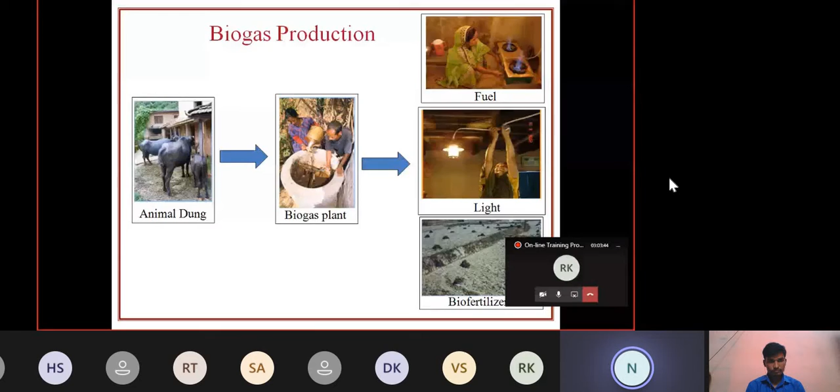Similarly, biofertilizer - when you have biogas or agro waste, you can make biofertilizer from that, because the slurry and other things and the compost can be used to make biofertilizer. These are the ways to make waste to wealth, they say, right? So these are the ways to do that.

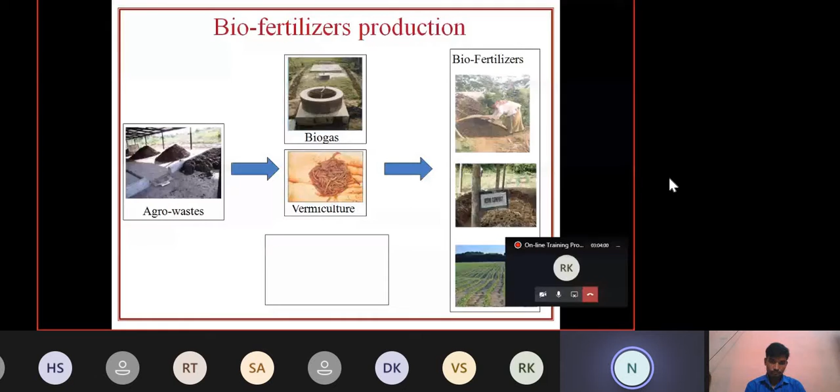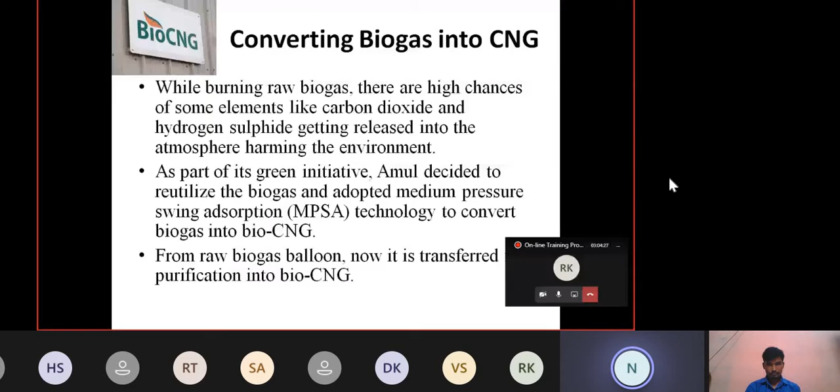Now, I said biogas is only 65% efficient. Is there a way to convert biogas into CNG that is almost equal to LPG, liquefied petroleum gas, that we are using? So it is possible. Biogas can be converted into bio-CNG also, and for that there are technologies available, like MPSA, and there are technology providers who can give about 93-95% efficiency, like LPG. And the same can be used as a fuel for cars also.

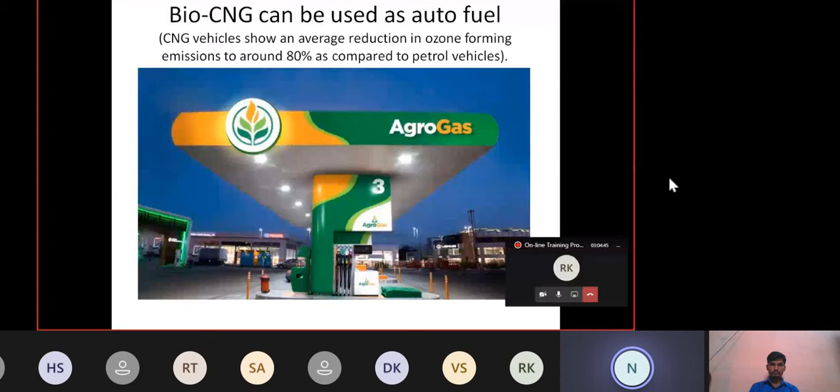It's possible, and it is called agro gas. Commonly it is called agro gas and bio-CNG, and it is about 93% efficient compared to LPG. So this is possible. Why I say this is, when you talk in terms of a cluster or a block, you can think in those lines.

Otherwise, for a panchayat, vermicompost is enough, windrow compost is enough. But when you think at large scale, it is possible - you can think in terms of how to convert waste into energy. These are ways to convert waste into energy, right?

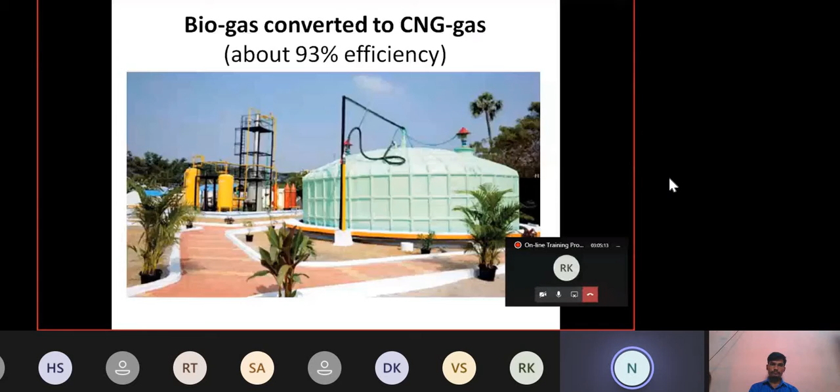So this is the biogas purification and bottling plant. Biogas is purified as CNG, bio-CNG, and then bottled, which becomes about 93 to 95% efficient, and it can be bottled and sold also.

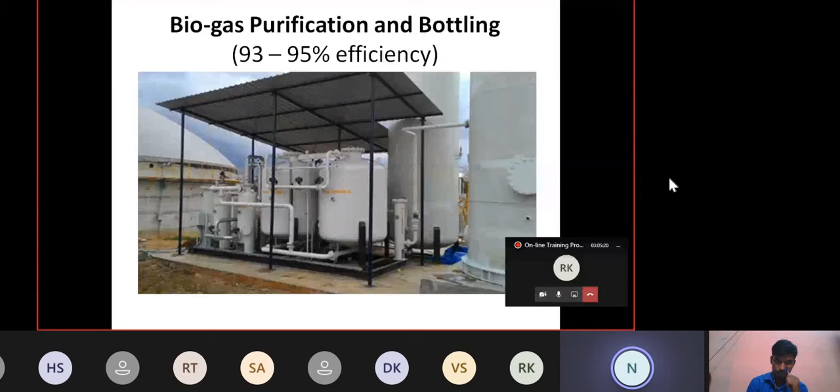That is one option. The sixth and seventh option you have is gasification of biomass for rural electrification. It is possible. Biomass - we have seen in areas like Haryana, Punjab, farmers burning agricultural waste, agricultural residues. Such agricultural waste, if in large quantity, can be collected and converted into electricity. All these together are called biomass, and that biomass can be used in a power plant, fed into a biomass gasifier, and converted to power.

Which can help some non-grid villages - if there are non-grid villages, that can help light some households there, depending on the amount of waste. But I told you already that I won't go into the details. And if you think in terms of electricity generation using biomass or waste like this, you need at least 300 tons per day. You must imagine 300 tons of waste - will I get that much?

In my villages, maybe all the villages put together, I may get about 5 to 6 tons maximum. So when you think about electricity generation this way, you need a minimum of 300 tons of waste. Why I tell you this is, if somebody is proposing electrification using biomass, you need to know that option is there, but do you have enough waste biomass to use it to full capacity? You must think in those lines. So when you think of this option, biogas is no problem, even at individual level it is okay.

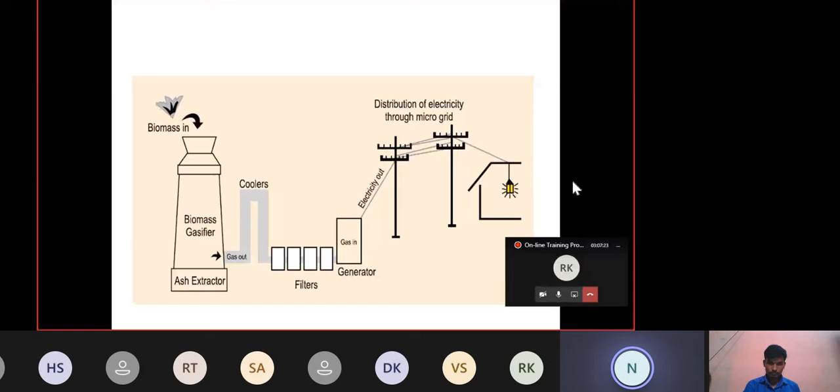This option like electrification, you can think of only if you get enough waste, and the minimum recommended is 300 tons per day. But if you can generate electricity, yes, there is a government program, and 100% power purchase is possible. Government can purchase 100% power at their tariff, and it can be sold. You don't have to think where to connect this power or how to do that. 100% you can connect it to one of the nearest grids, and you can get the money. However much electricity you are generating, that money can come to the cluster.

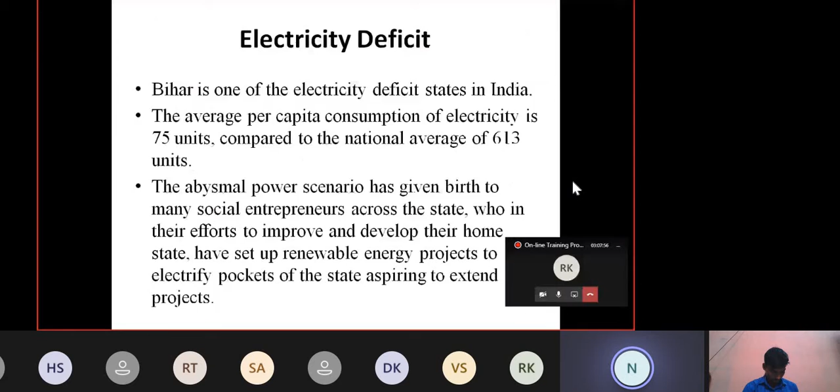There is SRE, Saran Renewable Energy, in Saran district of Bihar. They are trying to connect about 100 off-grid villages through biomass, by making electricity through biomass. As of now, there are about three biomass gasification units there, and the government is promoting that to become a 100 off-grid village electrification plant.

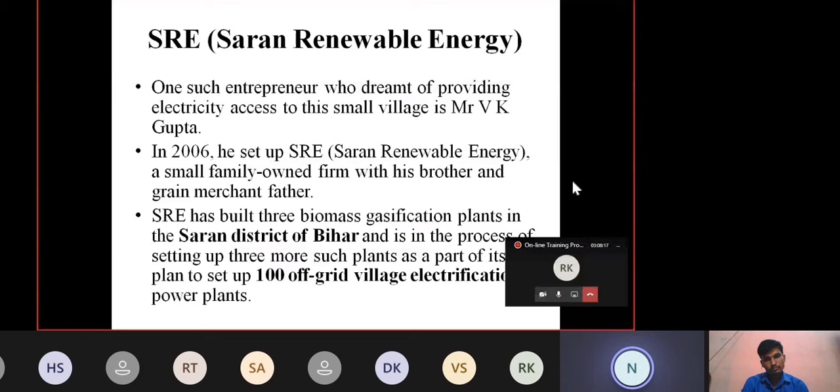Vegetable market waste, yes, it is there. We can use it for biogas, as I told you. Somebody was suggesting yesterday, why not feed it to the animals? Yes, we can feed it to the animals also if we have it. And slaughterhouse waste, fish market waste, all this, we know it can be used, like chicken poop can be used as fish feed. All these can also be used for biogas production.

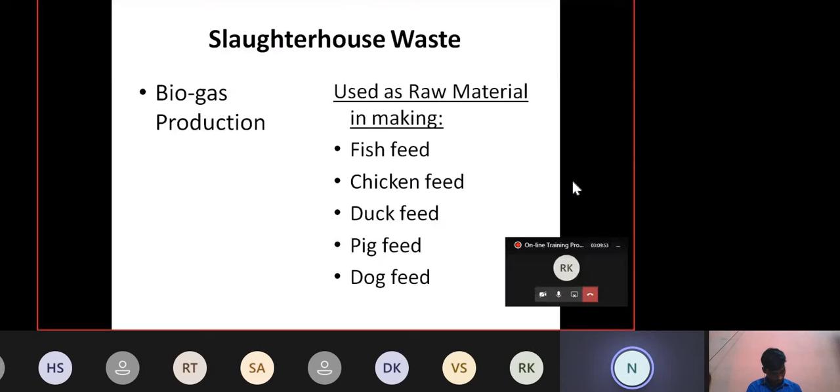Whatever slaughterhouse waste you are getting—and by slaughterhouse I don't mean only goat and sheep being cut—any slaughterhouse waste can go into biogas. Also, from the pieces you get there, the solid part can be used as raw material for making fish feed, chicken feed, duck feed, pig feed, dog feed. In these companies, wherever they are making these products, this is used as raw material. We just need to connect where they make it and supply to them. Otherwise, we can think in terms of biogas production. Wherever slaughterhouse waste is a nuisance, in our clusters we can take this up too. The person who will talk about biogas tomorrow might refer to this as well—slaughterhouse waste being used for biogas production.

There are other options, like all this biomass can be converted to charcoal. That's another option. Paddy husk can be converted to pellets like this, and paddy husk powder, if available in plenty, can be made into chicken feed. Peanut husk can be converted into pellets. And if there is a lot of paddy straw available, that can be converted to mushroom cultivation.

Mushroom, and then lemon peel—if there are lemon peels, that is used in making washing powder. Some places are also making products out of lemon peel; they collect lemon peel and then make washing powder, detergent powder, and all that. Eggshells are being converted into eggshell powder, which can be used in rose gardens. These are products we happen to see in one of the solid waste management units. They have a lot of products they are making, and they are selling them in the name of eco-age.

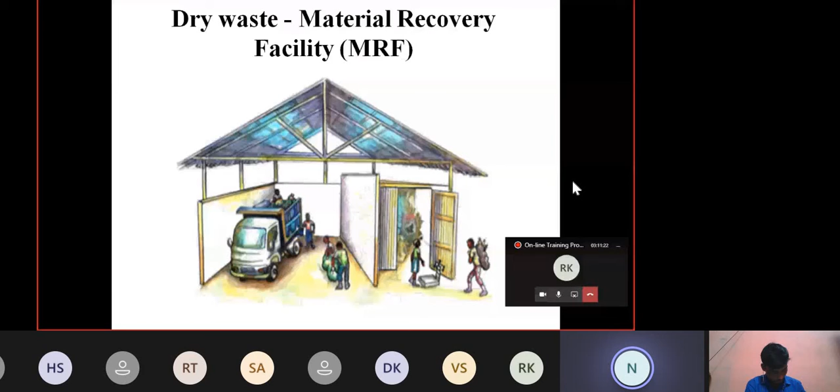That is about wet waste. When we talk about dry waste, I don't have to discuss much, because Mr. Rahul was discussing with you about dry waste and plastic waste, bottles. So dry waste includes plastics, papers, cardboards, bottles, cans, water bottles, Kurkure-type layered packets, multi-layered plastics, Tetra Pak—all these we have. All of these need to be further segregated; that's what we call secondary segregation. After we collect, we go for secondary segregation, where we segregate plastics into various color plastics, bottles into various color bottles, like that. So we need to look for recyclers, and we can send it to the recyclers.

So for that, we need to identify who are all the scrap dealers and recyclers available in my block, in my district. This list we need to find. If you see some states like Kerala, the Suchitwa Mission website, block wise, they have the list of scrap dealers and recyclers available. They have collected these details. I found it was there on their website.

Similarly, that is a good practice, because we cannot expect panchayats to go and search for them. So we can collect the contact details of the scrap dealers and recyclers and put it on our state website, Swachh Bharat Mission website, or Rurban Mission website. So the panchayats or clusters that need it can contact the scrap dealers and recyclers.

So contact details of scrap dealers, and this is important, and waste pickers, this is also important. There are also mobile apps available these days, and those mobile apps also you can try if they are working in your area. Some are working in Hyderabad, some in Bangalore, some in Lucknow, Delhi. So in those areas, if they can extend the service to your area also, you can see if you can.

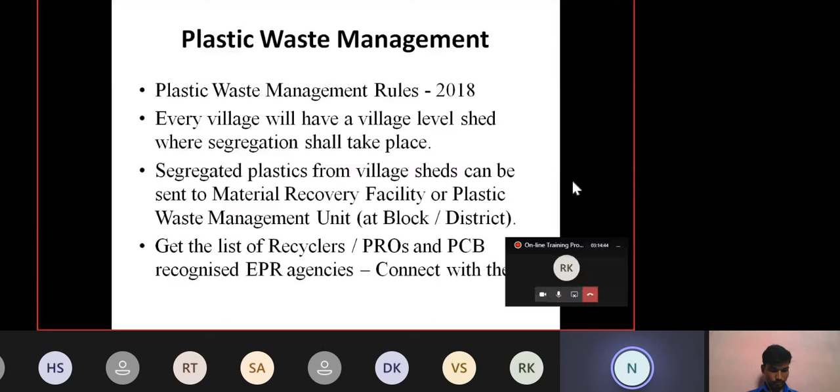And yes, Rahul was discussing with you the Plastic Waste Management Rules 2018, and every village or panchayat can handle their waste, and at the block level or cluster level we can have the material recovery facility, or we can have the plastic waste management unit, right? And he was also mentioning about EPR and identifying the types of plastics and all.

Some of the panchayats I saw long ago, about 1.5 years back, were trying to make plastic granules after collecting waste. I would say this is better left to the scrap dealers and recyclers, because each type of plastic waste needs to be shredded separately. Take the water bottle for example, the bottle must be shredded separately, the cap must be shredded separately, because they are different colors, you cannot mix them up. So it is better we collect and leave it to the scrap dealers and recyclers, instead of trying to make plastic granules ourselves, unless we are fully trained in that.

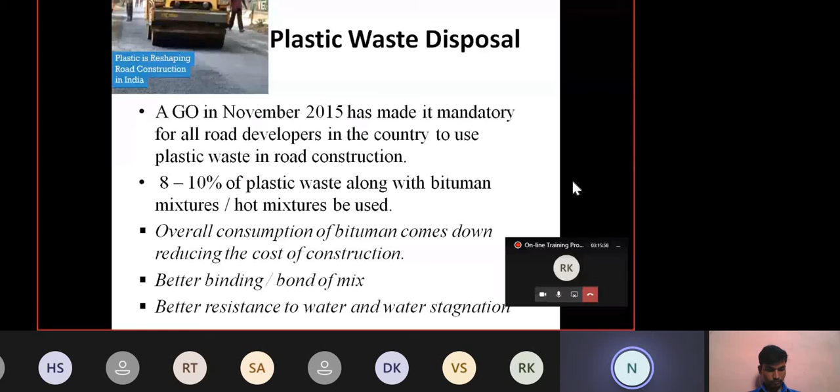So yes, the recycled products are coming, we know. And the next option is plastic waste being used in road construction. There is a GO from 2015 stating 8 to 10% of plastic waste can be used in making roads. When we say plastic road, it does not mean 100% plastic. 8 to 10% of plastic material is mixed along with the regular material used for making roads. So there is a GO that makes this possible.

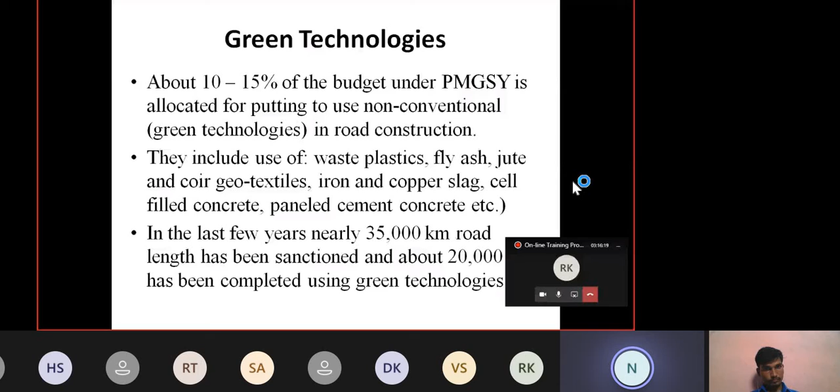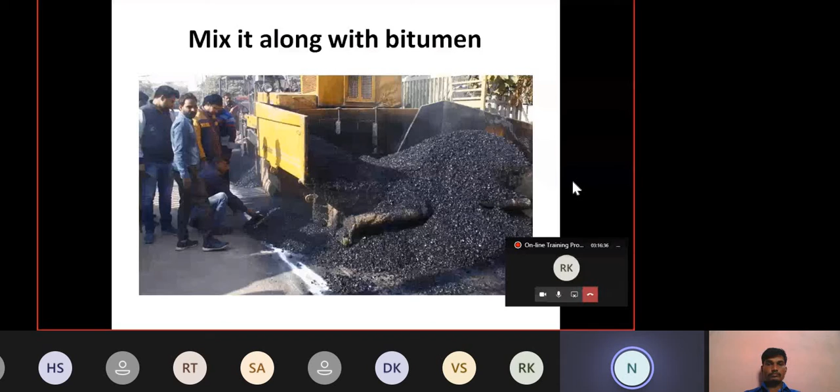Under PMGSY, Pradhan Mantri Gram Sadak Yojana, 10 to 15% of the budget is allocated exclusively for plastic roads. That way they call it green technologies, using green technologies for making roads. So that is another option we can think about when it comes to handling the plastics that we are not able to handle.

And construction waste, if they are there in your area, yes, they are being recycled. You can see here, all these are construction waste recycled products. Pavement blocks, like you see in pavements and also in petrol bunks, are made from this construction waste only. All these are converted, made like sand, and mixed along with cement again, and then you can make construction blocks.

We can even seek the help of SRLM and NRLM if they can help us in giving such training, and this is another option. Here you see this one.

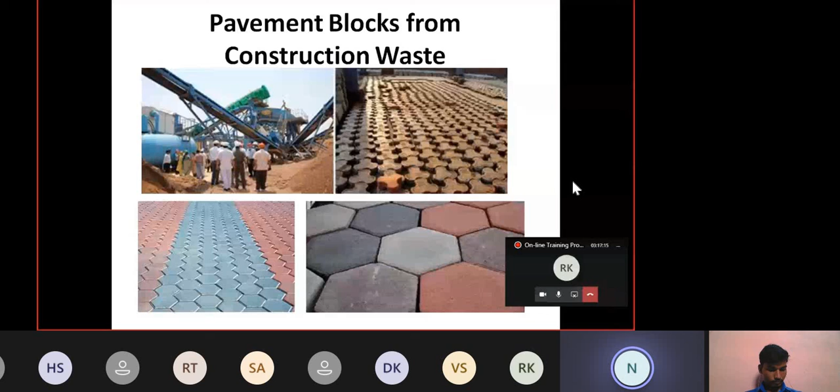We say multi-layered plastics, Kurkure packet, and we have Tetra Pak. Like juice comes in packs, you have seen 100 rupee juice packets come in Tetra Pak, and those Tetra Paks and multi-layered plastics are converting into sheets like this. It is possible there, happening in Gujarat, happening in Hyderabad also. Maybe in other places I am not aware of. I know these two places are making it.

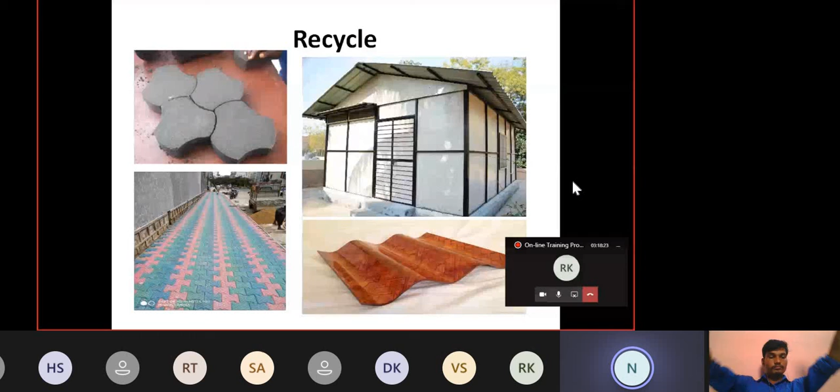Kurkure packets and Tetra packs are being made into sheets like this, and the sheets can be cut into any shape. Even the man who is making it has made his office like this. The Government of Telangana, I heard, has also given an order that they want to make bus shelters using this material. This can also be made into pavement blocks, and that can be used. There are many possibilities, recycling possibilities also.